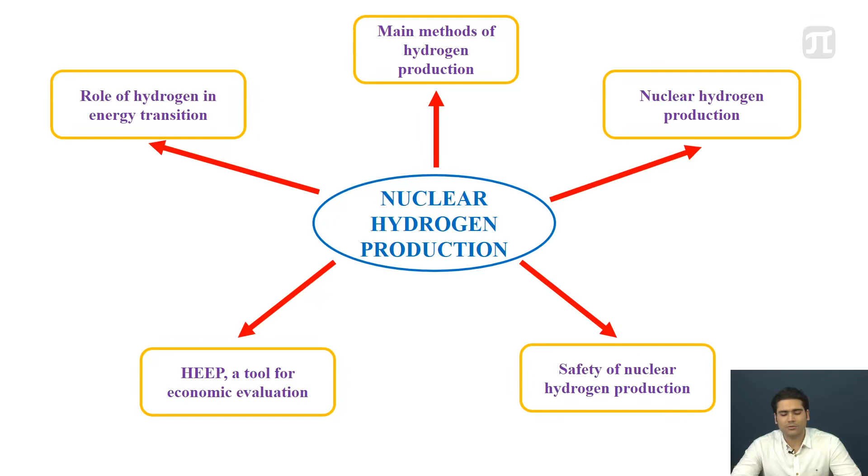As a next step, we are going to talk about nuclear hydrogen production, different schemes. We'll talk about this topic and a little about the safety of nuclear hydrogen production, because safety is really important when we are talking about nuclear power plants, and accidents in nuclear power plants are a general and global concern among all governments, universities, and researchers. Finally, we are going to talk about methods for techno-economic evaluation of nuclear hydrogen production. We'll talk a little about 2 important tools for techno-economic evaluation.

So with that being said, let's start our work with an introduction about energy consumption in the world. First of all, we should understand what is the role of hydrogen and how hydrogen can help us improve our environment and get to net zero emission goals. We will talk about net zero emission goals in the future.

According to this slide, the figure on the left shows world energy consumption by different sources. As you can see, liquid energy sources, like gasoline, have the maximum share of energy consumption in the world. Nuclear doesn't have a very significant share in comparison to, for example, natural gas, coal, or liquids. In the future, we expect an increase in consuming renewable energy sources, and in addition, nuclear energy.

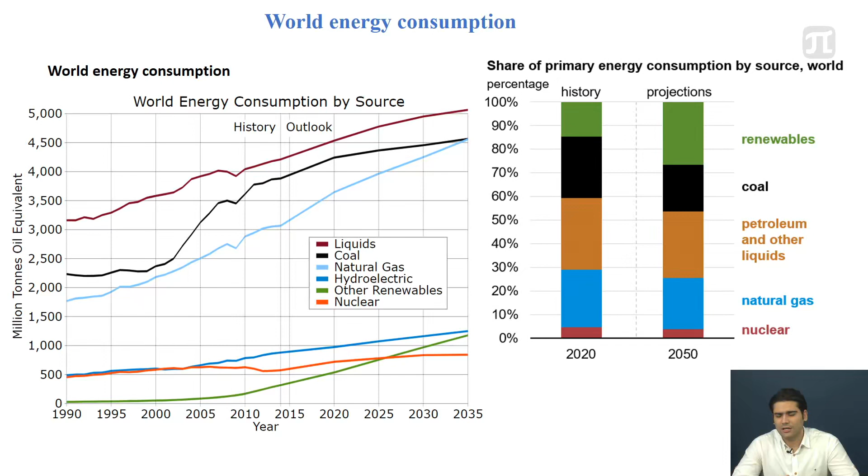On the right side of this slide, you can see this share in percentage. The renewable energy source projection for consuming renewable energy in the future has a significant amount, and for nuclear, we don't have such a sharp increase in consuming this energy.

Here we have a very important definition. We want to talk about carbon dioxide, but for carbon dioxide we have the definition of net zero emission. What is that? Net zero emission means that the rate of producing carbon dioxide in the environment should be equal to the rate of absorbing or removing carbon dioxide from the environment. If we have a balance between producing and absorbing or removing carbon dioxide, then we can say that we get to net zero emission goals.

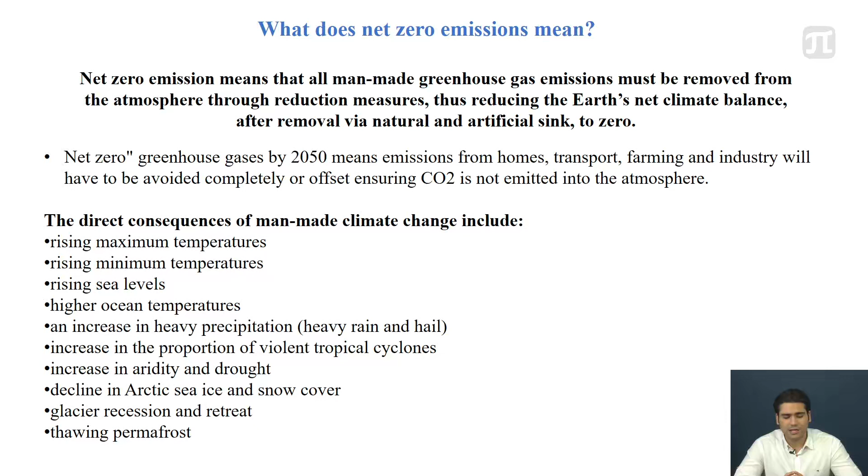Generally, I can tell you that increasing the amount of carbon dioxide in the environment can trap heat under the atmosphere, and of course the temperature of the earth will increase. It's a very important problem that we should think about and find a solution for.

Regarding net zero emission, hydrogen can play a significant role in reaching this goal. Hydrogen is the most abundant isotope in the world, and consuming it as a fuel can remove a lot of produced carbon dioxide from Earth, helping us get to net zero emission by 2050, since that is the main goal specified by the Paris Agreement. Hydrogen, as a very clean fuel, can help us get to this point.

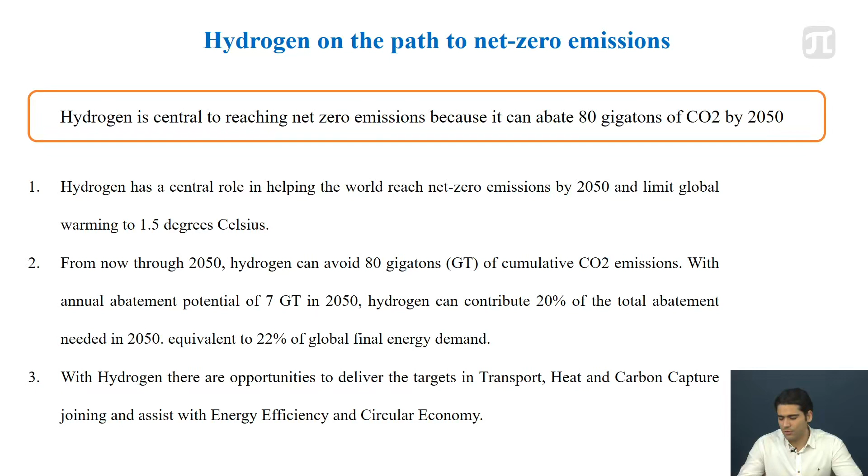So what is hydrogen? As I told you, hydrogen is the most abundant isotope in the world, and it has three different isotopes: H1, H2, and H3. When we talk about hydrogen production, we are only going to talk about H1, the first isotope of hydrogen. H2, deuterium, is another isotope of hydrogen, but we are not going to talk about that one. H3 is a kind of radioactive and unstable isotope, and we are not going to talk about that one either.

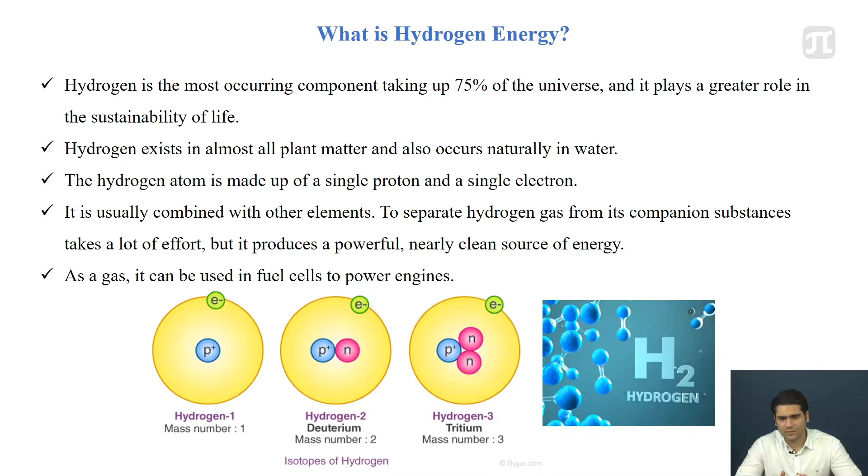We have different methods for separating hydrogen from different materials and molecules, like water for example, and in the next slide we are going to talk about them in a little detail.

Before talking about the main methods of hydrogen production, especially nuclear hydrogen production, let's talk a little about the main applications of hydrogen in the world today.

You can see that according to this slide, 55% of all produced hydrogen in the world is used for ammonia production, and 25% is used in petroleum refining. For transportation and other uses, only 10% of produced hydrogen is used. This means we have a great opportunity for increasing the utilization of hydrogen in the world.

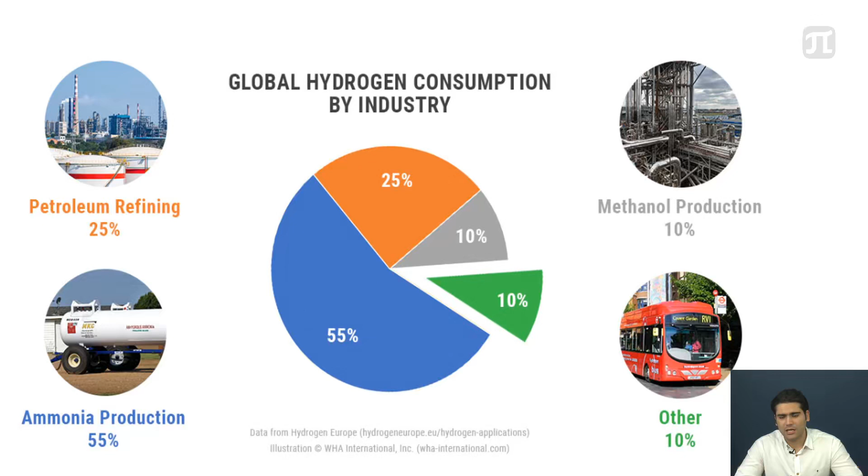Main methods of hydrogen production: in this slide, at the center you can see the primary energy sources. We have many different energy sources, like uranium, the main fuel for nuclear energy, solar energy, geothermal, hydro, biomass, gas, oil, coal - generally fossil fuels. These are all the primary energy sources, and we have two options for consuming them.

The first option is traditional utilization. It means you burn, for example, fossil fuel and produce energy, and use this energy for different applications. This is the traditional application of primary energy sources. But at the same time, we can use these energy sources in another form - we can produce hydrogen from these primary energy sources.

For example, by using uranium, we can produce heat and electricity, which we can use directly in different applications. But it should be noted that using the produced heat and electricity from uranium, we can produce hydrogen - I'll explain later by which method. Using heat and electricity produced by uranium, we can produce hydrogen through methods like electrolysis, thermochemistry, or chemical reformation.

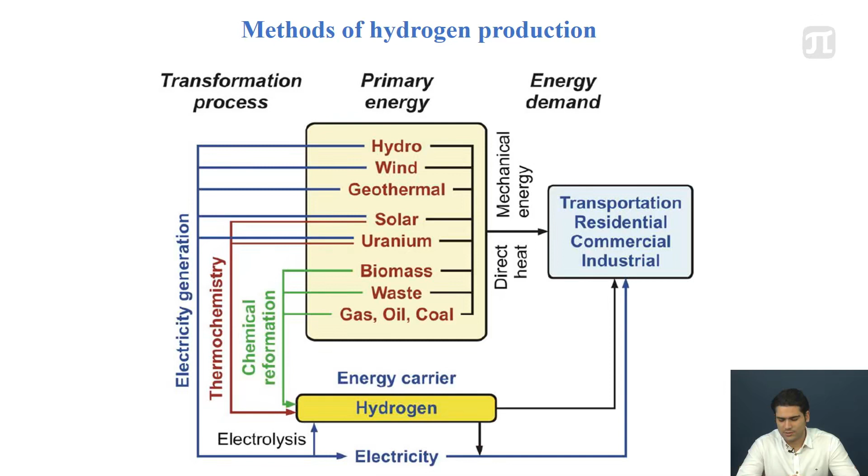In a traditional or thermal power plant, we only burn fossil fuel, but in a nuclear power plant, we have a reactor containing nuclear fuel. By consuming this nuclear fuel in some way not important for our lecture, we can produce energy. This energy is removed from the reactor by a coolant, like water, which goes to the steam generator to produce steam. The steam goes to the turbine building, rotating the turbine shaft to produce electricity. So the scheme is completely the same as a traditional power plant - the most important point is replacing a boiler with a reactor.

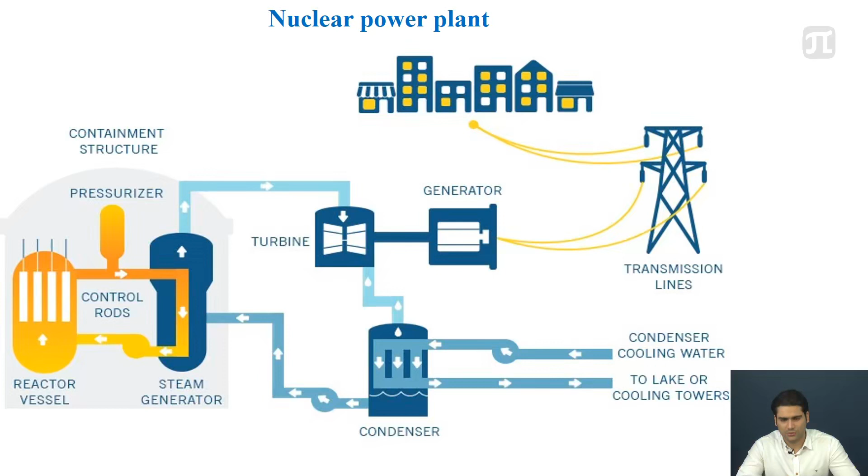We can classify nuclear power plants into different groups based on different parameters. For example, classification by type of coolant, classification by type of moderator, or other things. But here in nuclear hydrogen production, we are going to go through classification by generation.

What does it mean? We have different generations for nuclear reactors. The first generation reactor was just after the Second World War, some very famous reactors like the Fermi reactor. It was the first generation, very simple, without any digital instruments and other things. So it was a very simple reactor.

After that, governments decided to develop their technology and produce energy from nuclear power plants. So the second generation of nuclear power plants, like for example PWR or VVER, the Russian version of PWR, or CANDU or RBMK, they were developed to produce energy.

After that, by developing the technology, we experienced the third generation of nuclear power plants, like for example ABWR, Advanced BWR, Advanced PWR reactors, or EPR. The most important difference between this generation and the previous one is increasing the safety aspects of the reactor, in addition to decreasing the cost of the nuclear reactor.

So after that, we had the third plus generation, some kind of advanced VVER, or again advanced PWR reactors. Again, we worked on the cost and safety of the system.

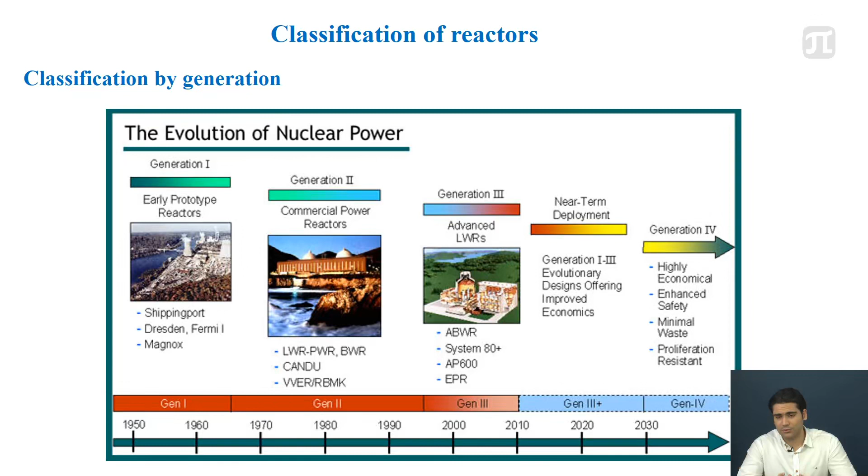nuclear hydrogen production. In this lecture, we are going to talk about both of them, fourth generation and third generation, and I will tell you how we can produce hydrogen using third generation or fourth generation reactors.

A nuclear power plant is not used only for producing electricity, and we have many different applications for nuclear power plants. The reactor, the nuclear power plant that not only produces electricity but also produces heat for many different applications, is called a cogeneration plant, meaning at the same time we can produce electricity and heat.

So for cogeneration plants we have two different categories. The first one is low temperature cogeneration and the next one is high temperature cogeneration. In low temperature cogeneration we can use low temperature steam extracted from the turbine for district heating, for seawater desalination, and low temperature industrial process heating, and in addition for low temperature electrolysis for hydrogen production.

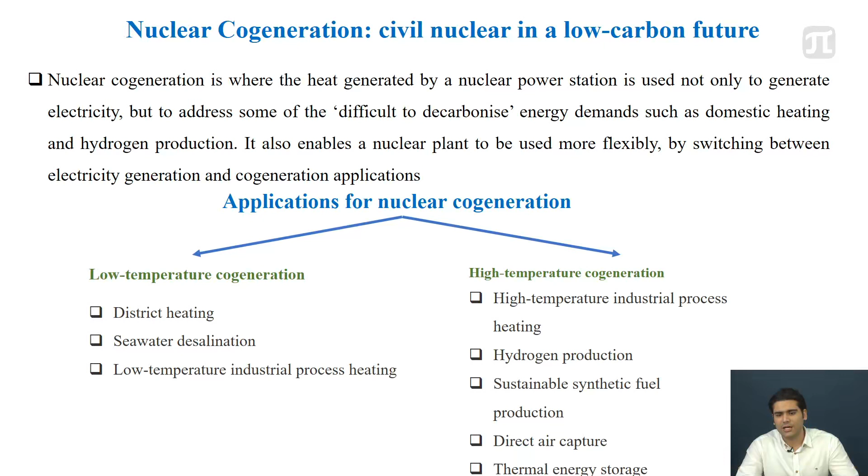In high temperature cogeneration we can use high temperature steam extracted from the high pressure turbine of the nuclear power plant for high temperature industrial processes, and the most important application for hydrogen production, especially for high temperature steam electrolysis, which we're going to talk about later in detail.

So in this scheme you can see the applications of a nuclear power plant. As you can see, we have three main lines from here. Radiation, so we can use the radiation for different applications like medical isotopes, and other things that are not in our lecture today, beyond the scope of our work today.

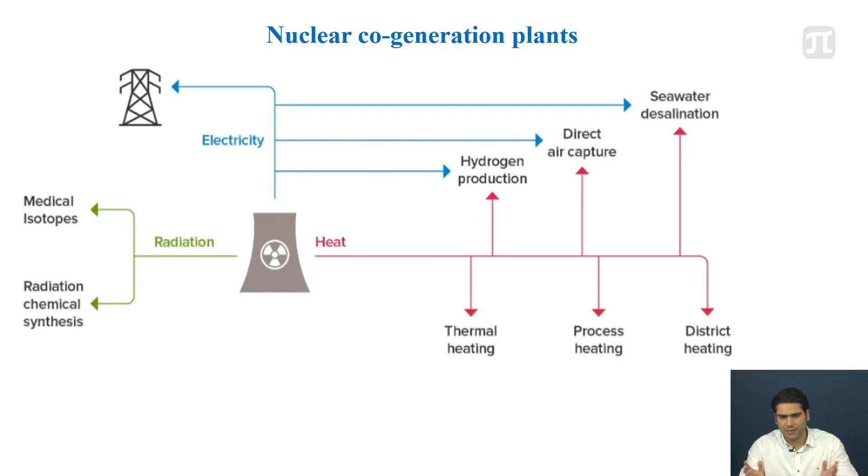Then we have heat, so from this heat we can have thermal heating, process heating, district heating. You can see seawater desalination, and at the same time we can produce electricity, and this electricity can be given to the grid or network of the city, or can be given to, for example, the seawater desalination plant or nuclear hydrogen production. So you can see we have many different applications for a nuclear power plant.

In this scheme, you can see a general and typical scheme of a nuclear cogeneration plant. You can see that by extracting steam from the low pressure turbine and giving this steam to the intermediate loop, number 12, here we can use the heat of this extracted steam, and for example in this scheme we have a seawater desalination plant, but no different.

Instead of a seawater desalination plant you can put a nuclear hydrogen system or hydrogen production system, and this is a very general scheme for combination of a secondary system to the nuclear power plant, integration of them.

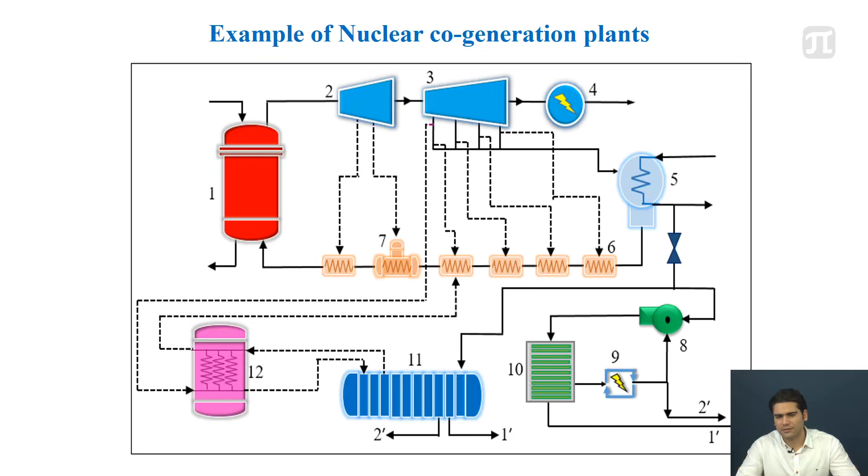And of course we have many different schemes for combination of the secondary system to the nuclear power plant, and we should have a kind of optimization for that.

Nuclear hydrogen production methods: here you can see we have heat and electricity from nuclear reactors. So the produced electricity can be used in low temperature electrolysis, and also in high temperature electrolysis. I told you in low temperature electrolysis the temperature of water is less than 100, but by increasing the temperature of water, the required electricity for electrolysis decreases.

So it's a very good option because we know that electricity is more expensive than heat. So if we consume heat to increase the temperature of water and consume less electricity, it's a very good option, and it's a very positive point for us.

The next method is thermochemical reactions. In thermochemical reactions, you should perform several reactions and produce hydrogen, and it takes a lot of energy. So for this method, we have to use fourth generation reactors because the produced heat and temperature in this kind of reactor is very high.

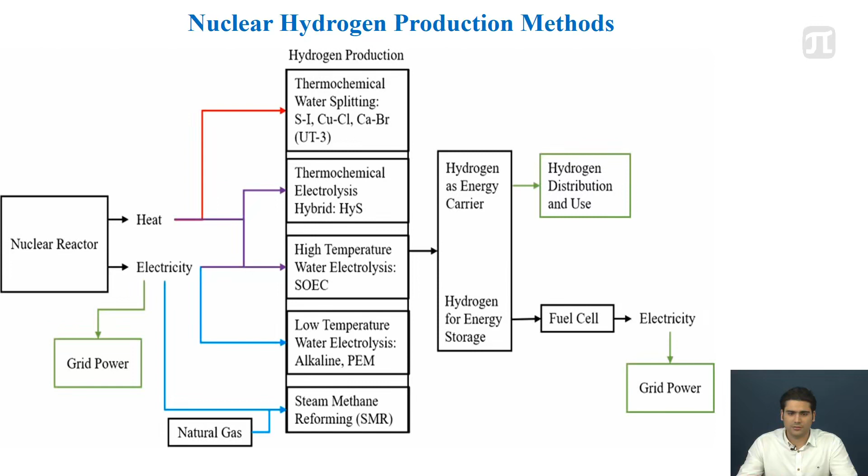Sometimes we can use steam reforming or carbon dioxide reforming. Again, we need a huge amount of energy, and fourth generation reactors are the best option for us regarding this issue. As I told you, the fourth generation reactors are under development nowadays, and here you can see the main types of fourth generation reactors.

Gas cooled fast reactor, of course the coolant here is gas. Lead cooled fast reactor, again here the coolant is not water, it is lead. Molten salt fast reactor, this is a fast reactor, and the coolant is molten salt. With molten salt, the temperature can get to 600, 700, 800, depending on the design. Sodium-cooled fast reactor, supercritical water-cooled reactor.

In supercritical, the temperature can be increased so much. For example, in light water reactors, typical reactors like VVER or PWR, the temperature is not greater than 320, 330. But in a supercritical reactor, the pressure will be increased so much, for example, 22 to 23. It should get to the critical point of water, and then you can increase the temperature of water. So it's a good option. The efficiency of this system in comparison to typical VVER or PWR reactors is higher.

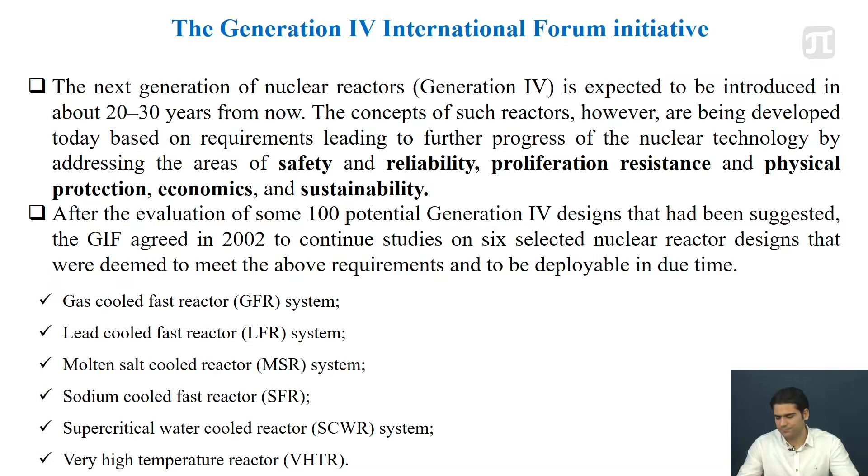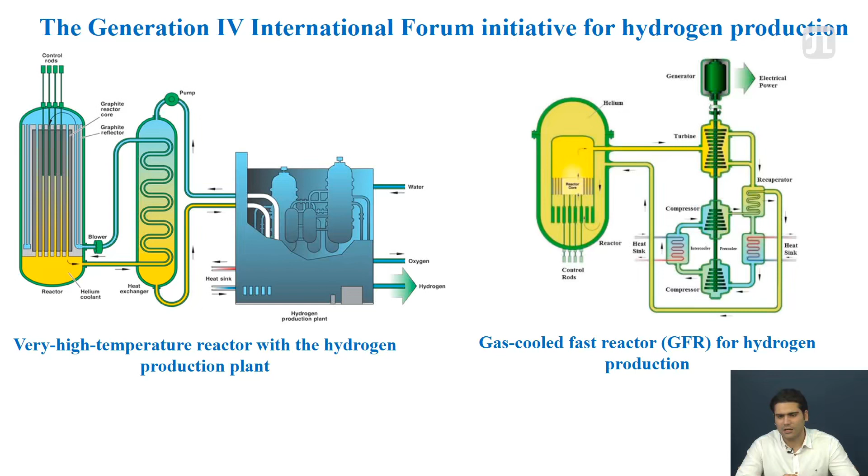And the next picture is a gas-cooled fast reactor for hydrogen production. Again, here the coolant is a kind of gas, and the gas goes to the turbine, rotates the shaft of the turbine directly, and produces energy and electricity. So we can use this produced energy and electricity, in addition to recovering the heat of the coolant, in the hydrogen production unit.

So for techno-economic evaluation of nuclear hydrogen production, we can suggest two different codes and programs. One of them is HYSYS. Aspen HYSYS is a very powerful program for simulation of the thermal scheme in the nuclear power plant. And for economic evaluation, we can use HEEP. This program is developed by the IAEA and is a very useful program for economic evaluation of hydrogen production.

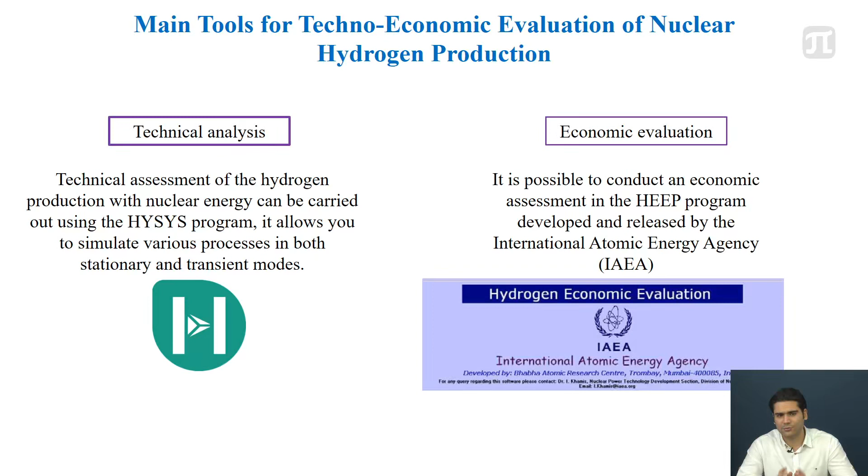So the most important point here is the combination of technical analysis and economic evaluation. So we should think about it. How is it possible to combine them? After performing a technical analysis, we should extract some parameters, take these parameters to the economic evaluation, and obtain the final cost. And the best criterion for selecting the best option and the best method is cost. So we have to perform a techno-economic evaluation for nuclear hydrogen production.

And finally, I want to talk with you about the Center of Nuclear Advanced Technology at Polytechnic University of St. Petersburg. In this center, we have many young researchers working on different directions of nuclear energy and nuclear science. One of them is nuclear hydrogen production, and in this center we have developed some algorithms and programs, we have published several articles in this field, and now we are working on this topic extensively.